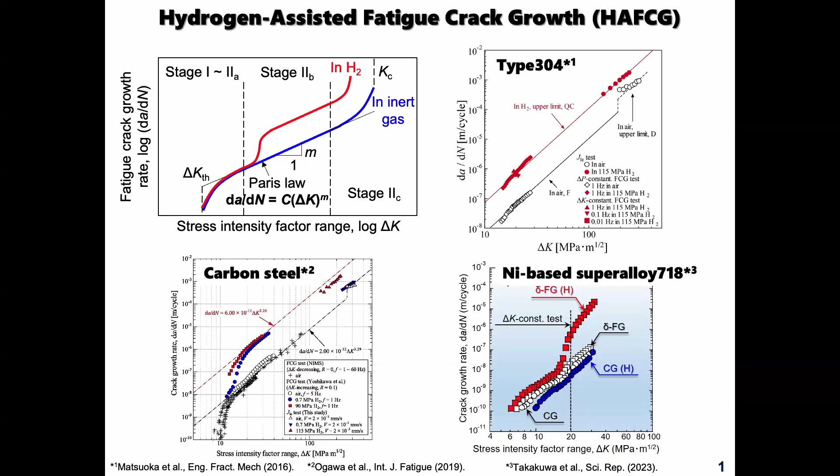So we have continuously studied this topic by performing several fatigue crack growth tests with the control of the gas temperature, gas pressures, loading frequency and stress intensity factors so as to make clear the basic mechanism from the viewpoint of the hydrogen-dislocation interaction.

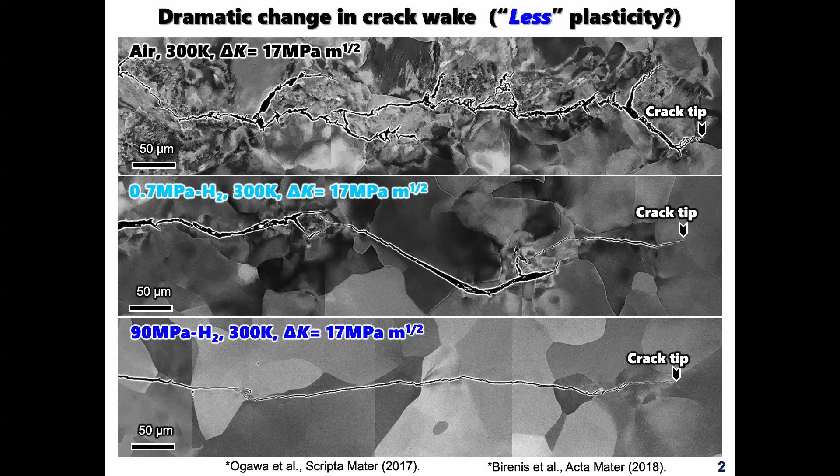So this phenomenon should be time-scale behavior. From this viewpoint, we can discuss the basic mechanism from the viewpoint of the thermally activated process of hydrogen-material interactions, such as hydrogen-dislocation interactions.

So we thought the basic mechanism of hydrogen-assisted fatigue crack growth can be understood more comprehensively by focusing on the temperature dependence and loading frequency dependence from the viewpoint of the thermally activated process of hydrogen-dislocation interaction around the crack tip. So this is the motivation of our studies.

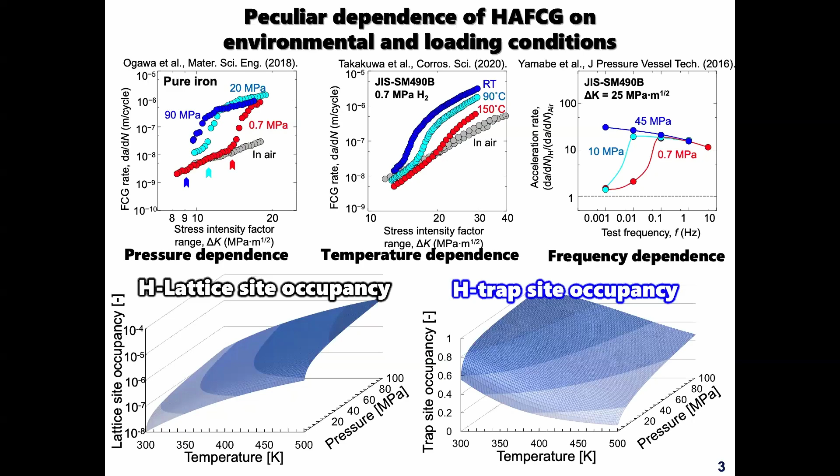The material tested in this study was low carbon steel with 0.16% carbon, which had typical ferrite-pearlite microstructures. And we performed several fatigue crack growth tests using CT specimens in nitrogen gas and hydrogen gas with a pressure of 0.7 megapascals. And this presentation will show you a part of the experimental results acquired by delta K constant tests at 30 megapascal square root meters, changing the loading frequency from 0.01 hertz to 1 hertz for various temperatures from room temperature to 423 Kelvin, 150 degrees C.

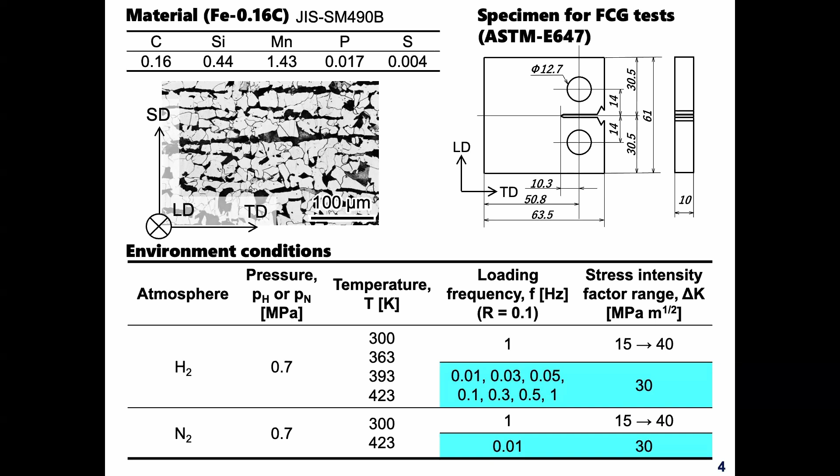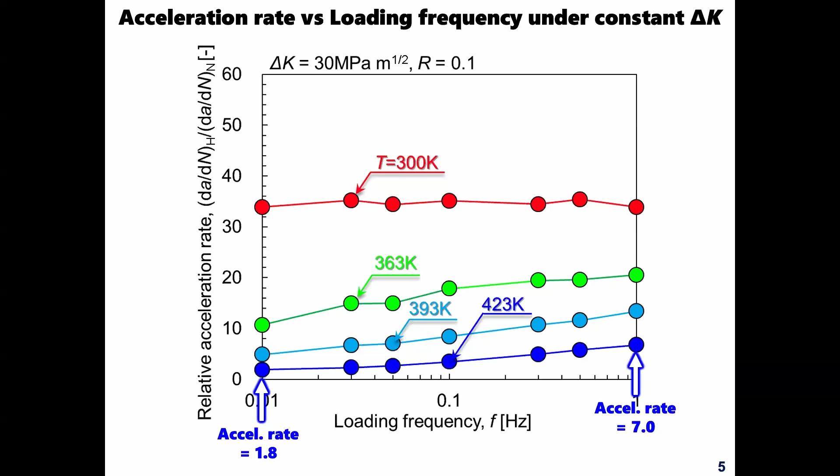So these results, including the temperature and loading frequency simultaneously, are so important for interpreting the mechanism of hydrogen-assisted fatigue crack growth from the viewpoint of the thermally activated process.

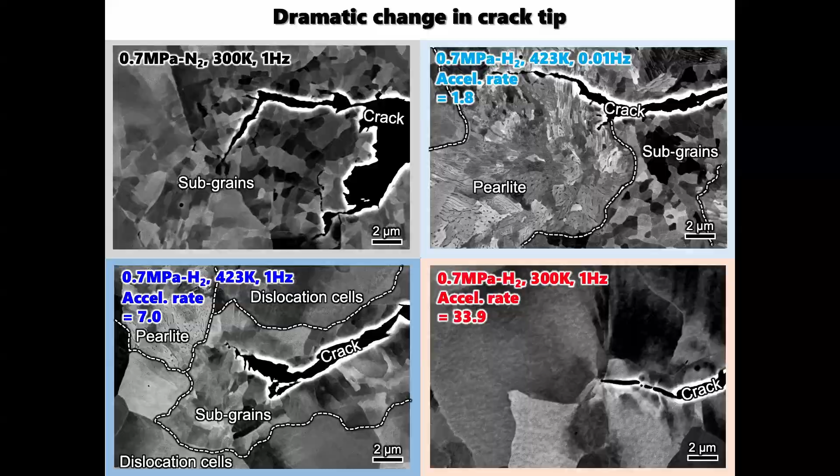So to discuss our series of experimental results, I have to introduce a nice numerical simulation result performed by Professor Matsumoto, sitting there. He studied the interaction between hydrogen and edge dislocation in BCC iron at different temperatures and different dislocation velocities by long time scale molecular dynamics.

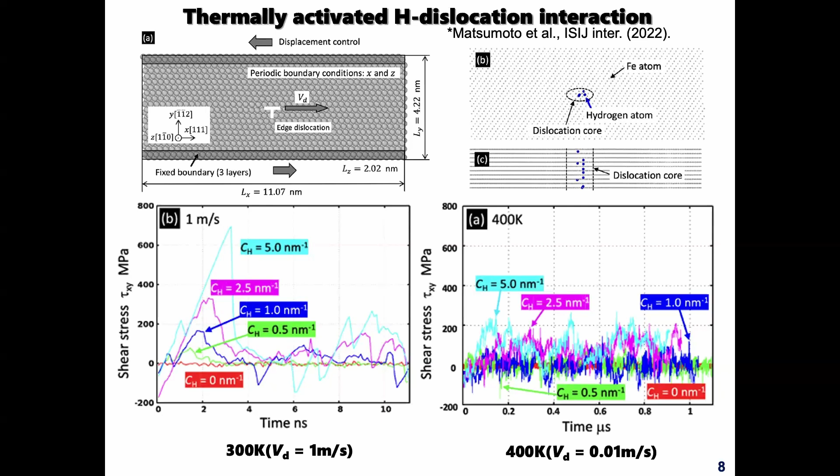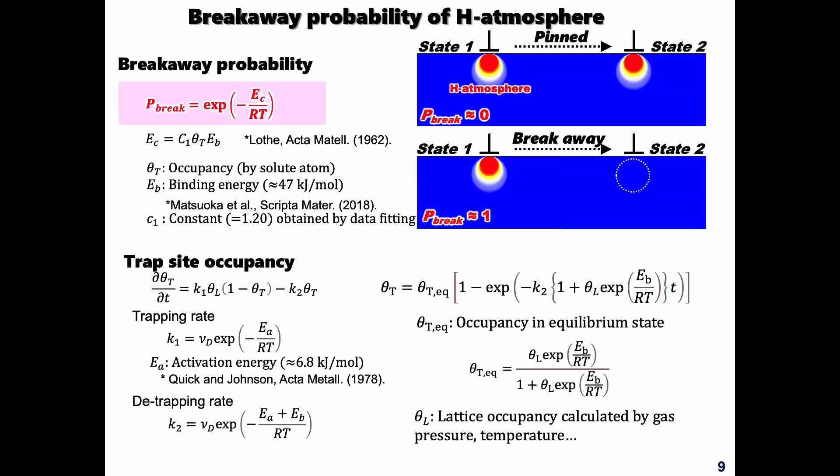And I confirmed that the hydrogen trapping and detrapping state can be regarded as almost equilibrium in the loading frequency range from 0.01 to 1 Hertz. So I can use the trap site occupancy in the equilibrium state given by this equation. So now we can define the experimental equation with the breakaway probability.